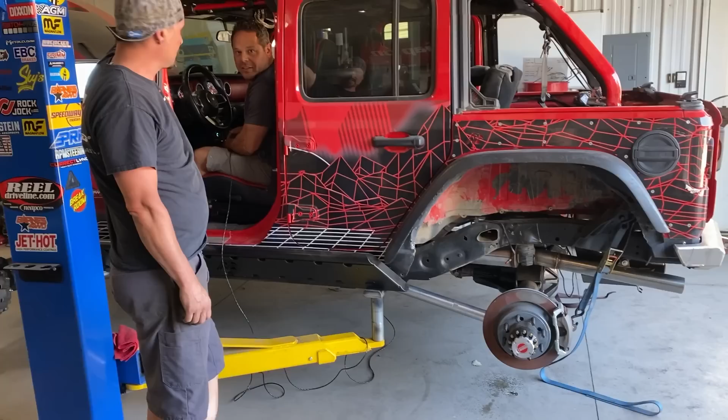That's open? Holy shit. Oh my God.

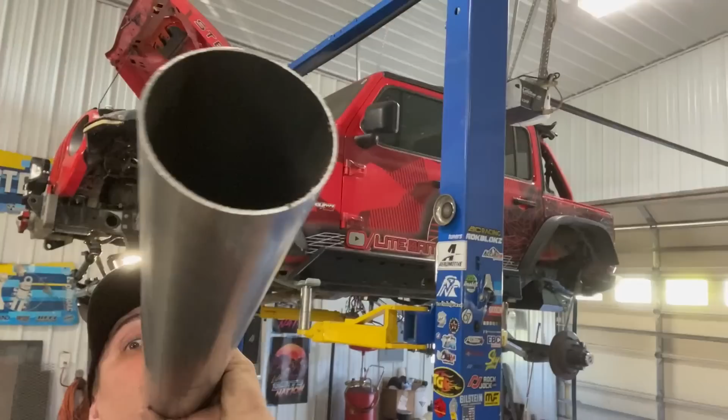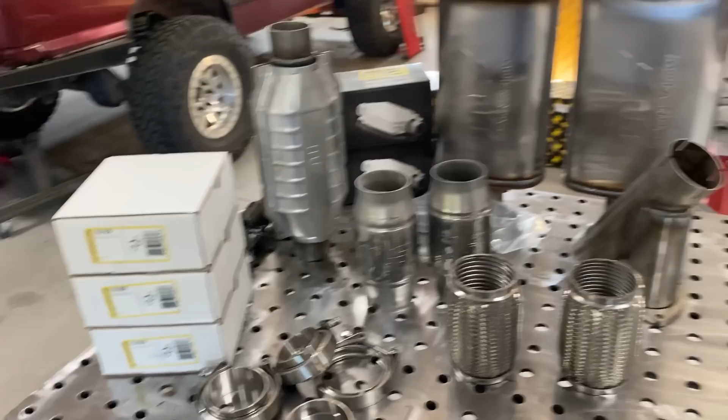We still don't have any shocks, but I do have time, and there's one other big job that we have to do to the stepchild before she can roll out of here. I need to put an exhaust in her. Let me show you what we got. We got a table full of Magnaflow parts. If you remember, the old one came out of the headers, went underneath the transmission bell housing, then up over the front drive shaft and collected with the driver's side header.

Now that we have the Atlas, we have a whole bunch more room under here to run all kinds of good stuff. I do love catalytic converters. I'm not gonna lie. Some of you guys are gonna hate me for that. I hate the way the newer cars smell so bad when you don't have the cats in them. Call me a wuss. I don't need my eyes burning out when I'm in the shop. I like the catalytic converters because it just scrubs the smell.

Long time ago, cats used to rob horsepower. Today they're extremely efficient, and I'll show you some cool ones here in a minute. But we have a lot of room to run cats and a muffler and a full exhaust. Now, Kevin had the bright idea that the Bronco has Baja mode. I know you saw that video. So he has quiet mode and Baja mode.

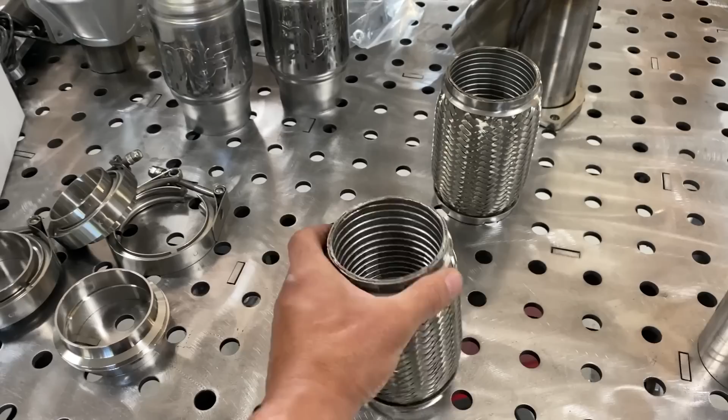Flip of a switch, it goes from quiet and tame in the neighborhood to loud and obnoxious on the freeway. Kevin had ordered some parts for this to do that, but packaging, we don't have the ability to do it. But let me show you what we do have. We got some really cool parts that will do some space saving. You gotta have somewhere for the flex to be because the motor is gonna move, the chassis doesn't. So this is gonna be your flex.

This is internally convoluted and not internally meshed. These ones will take more velocity, more power, more heat without coming apart inside. If you remember the Ferrari exhaust video, when we took the headers off before we put the Klein exhaust on it, the inside of that one bellow was mangled. The mesh doesn't like high volume, high horsepower, high velocity, high heat stuff. So this guy will do much better. So we're gonna run two of those.

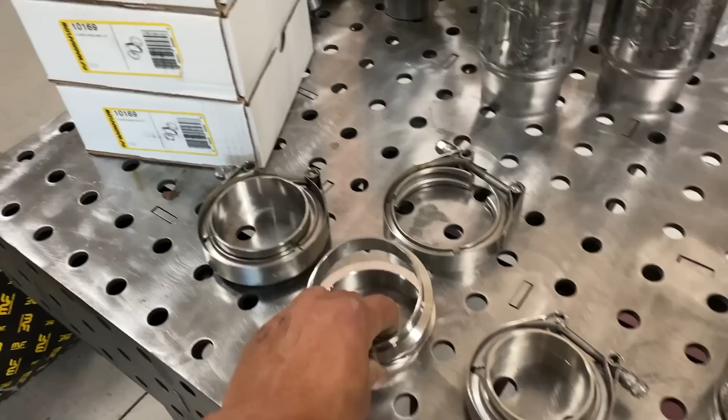We're gonna put it all together with V-bands. So I have some 2.5s and some 3s. The reason we have 2.5s is because Kevin wanted to run a bypass. So we were gonna put a QTP electronic cutout valve in there. What that would have done is we would have had 3-inch out of the exhaust and it would have gone straight out. And then we would have had a 2.5-inch go through, well, actually the 2.5 would have been on here. We would have cut this off to 3.

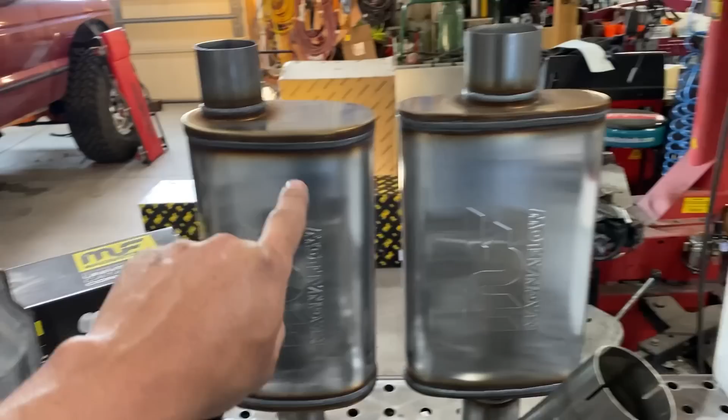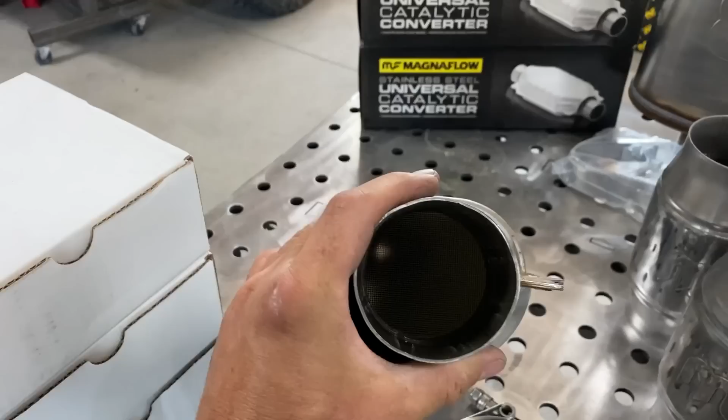It would run out the 2.5 through a muffler right here. No, it's actually that one. Through this, and then when you open the valve, it would run out the 3-inch. But again, packaging, and I'll show you why. Also, this is your standard catalytic converter, right? Got the meshy stuff inside of there, and this is what a cat looks like.

Now, this one I am not going to use, but this one is going on Phoebe when we get to the mess that's on it. Anyway, we're not using that. We're going to use these cool 3-inch catalytic converters. We also have a 3-inch builder's kit. Now you can order this straight from Magnaflow just like this.

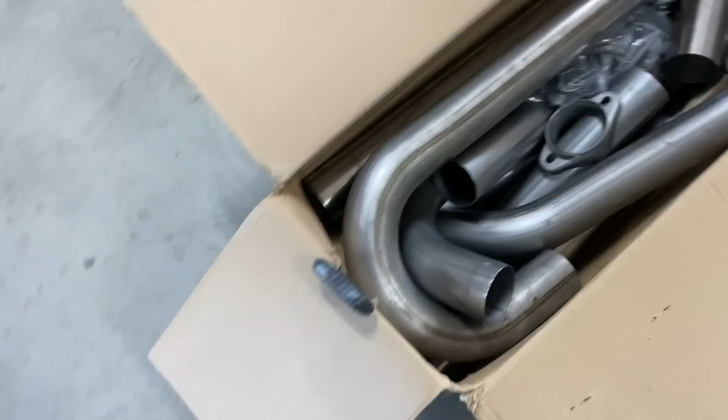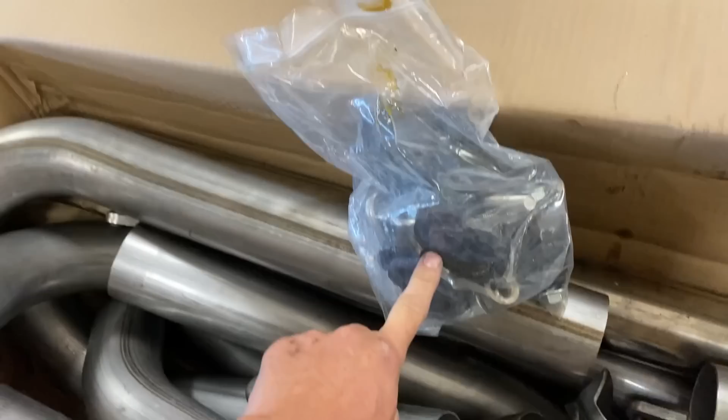This box will pretty much do a full exhaust from the manifolds all the way to the tailpipe minus a muffler and a cat. So this is a full box of pipe. Comes with 90s, 45s, straights, adapters, bellows, or the flex. This is what would go to your stock manifold. There's just a lot of cool stuff in this box. It also comes with hangers and the rubbers. So this is an entire kit to be able to run a V8 with a 3-inch exhaust.

I'm gonna dig all these parts out and show you everything that comes in the box. But this is what we got to put in her. So let me show you what Kevin's brain was thinking. I did a little doodle for you. This is what Kevin's original idea was. Both headers on the V8. We would come out a header, 3-inch pipe out of both of them. They would then go to a collector, then they would go to a Y pipe.

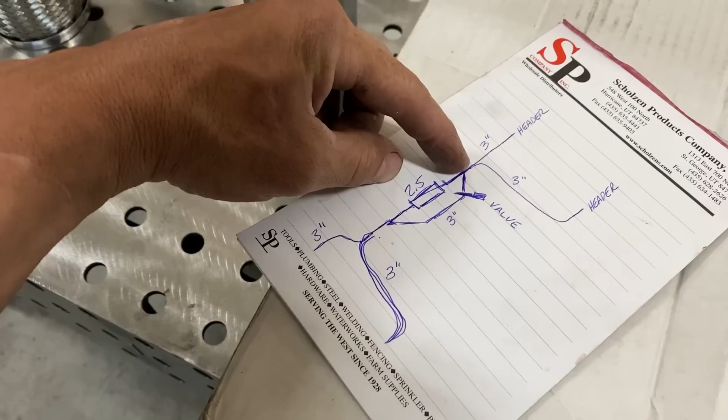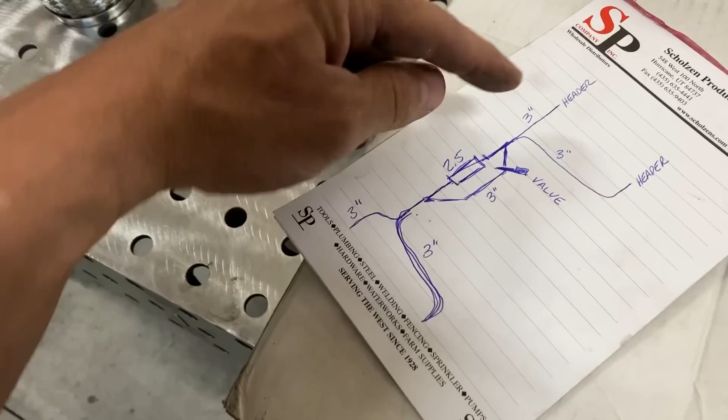We'd put the valve on the Y pipe. When the valve is closed, it forces all the exhaust through a 2.5-inch muffler and then back out to 3-inch and out the tailpipes. When he wanted sport mode, this valve would then open up because this is 3-inch and this is 2.5. The path of least resistance would be to go out the 3-inch, bypassing the muffler. So this would have been the path of least resistance, and the exhaust would essentially be louder.

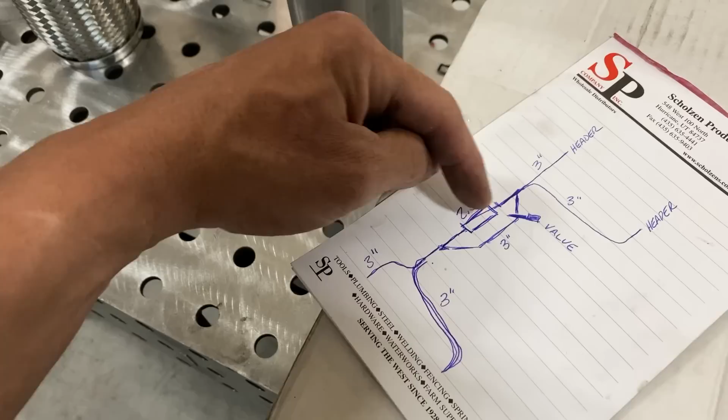This will cancel out harmonics and stuff. So if you pinch this down here, that exhaust wants to go down the 3-inch side. Will this be full straight exhaust sound? No, because some will still travel through this 2.5. The majority will go through the 3-inch.

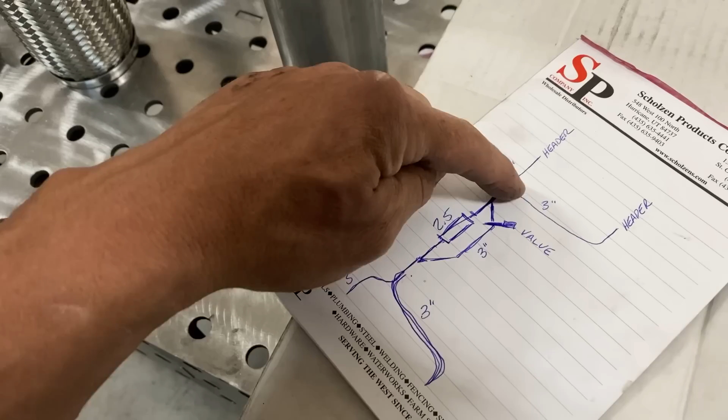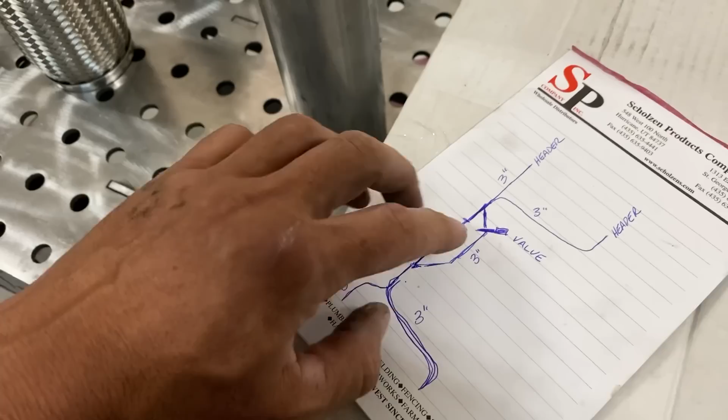This could be flipped also, so the 3-inch would go straight through and the valve would be here. I just drew it this way. For packaging reasons, you can do whatever you want, but yes, the path of least resistance probably would be the 3-inch to go this way. This is just showing you how this system would have worked if Kevin would have gotten his way.

With that being said, there will be a drive shaft right here. It'll have to collect on this side because there's too much stuff going on over here. The fuel lines are over here, most of the wiring, everything's over here. The only thing over there is brake lines, which I can deal with. Now, I have a whopping 24 inches between this cross member and that cross member to stick a muffler, that valve, and a whole nother piece of pipe.

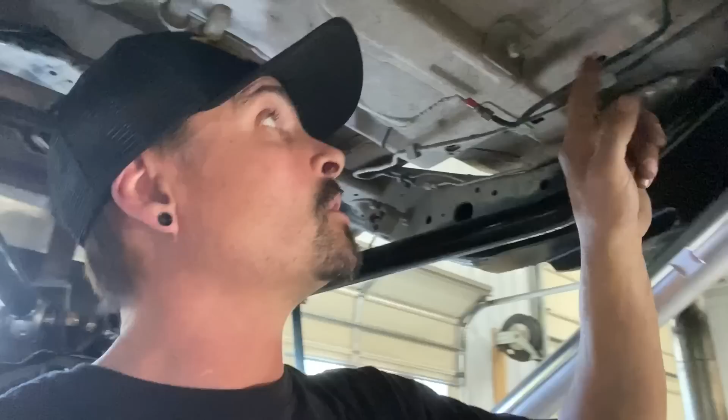And then turn and come out of this, go over this link. Don't mind these, they're just out of the way. This is all gonna get cut. Go around this, go over this link, and then go out. There is no way humanly possible that I can put a muffler, a valve, a collector, basically a Y pipe, another Y pipe, and then turn it and go out of that cross member.

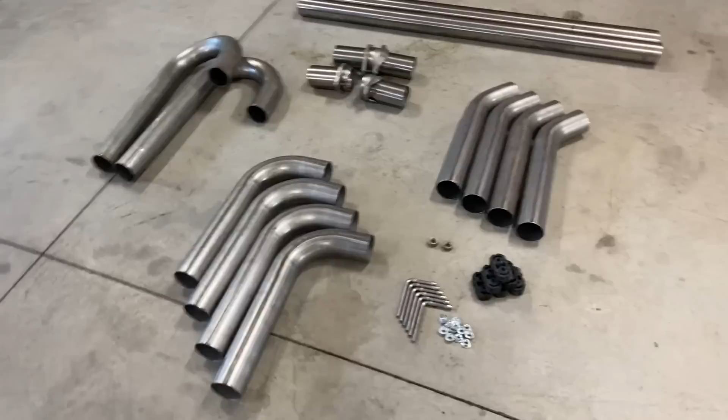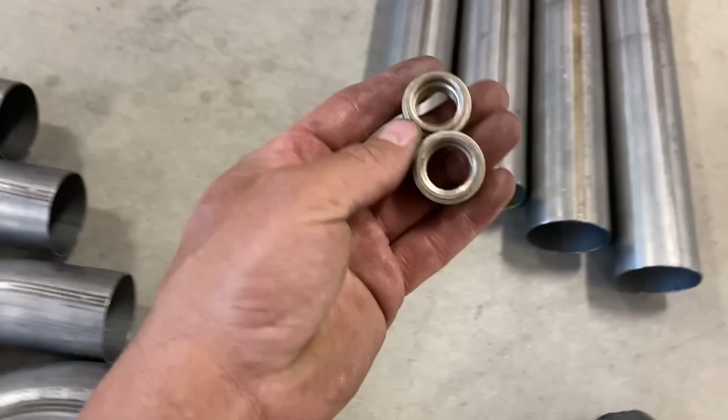So this is what comes in the builder's kit. You get 4 90s, 4 45s, 2 180s, 2 collector guys, a bunch of hangers, some rubbers, and you also get 2 weld-in bungs for the O2 sensors. And you also get 2 4-foot pieces of straight stainless.

Now the stepchild already has 2 O2 bungs that come right in the end of the manifolds, so I don't need those 2. So I'll add those to my collection. But that's what I have to do. I have a couple of random pieces upstairs too from like old kits and stuff. But I guess let's see what we're gonna do here to get this thing in.

Oh yeah, one more thing. This is what Kevin thought was gonna fit under the stepchild. This thing is like 32 inches long. It's not gonna fit. Look at the size of this. This is not gonna fit. Kevin, I don't even think this will fit under the Jeep by itself. This thing is gigantic. I mean, next to the trash can, it's taller than the trash. This thing is gigantic, Kevin.

That's what she said. All right, enough of the jokes.

I have 2 V-band 3-inch right off the manifold, so I'm gonna start there. So we're gonna go get some 3-inch V-bands. Probably goes directly straight into those two small catalytic converters, which should sit about here and there. I also got some heat wrap, which I haven't done yet. I haven't gotten that far, but this will all be heat wrapped because the exhaust is gonna run through here. And then I have to turn and go directly under this and collect over here. So let's get some cats in there.

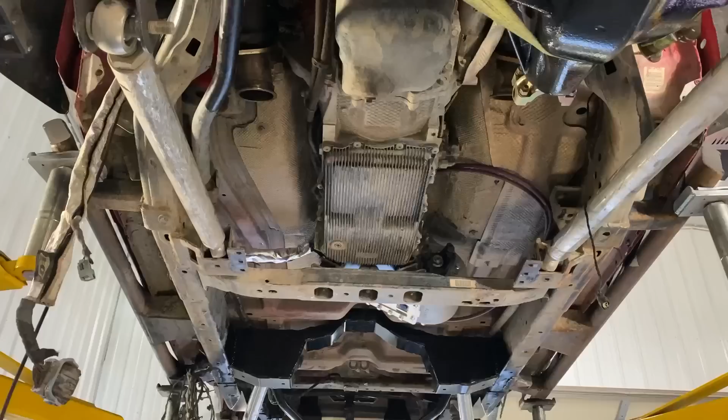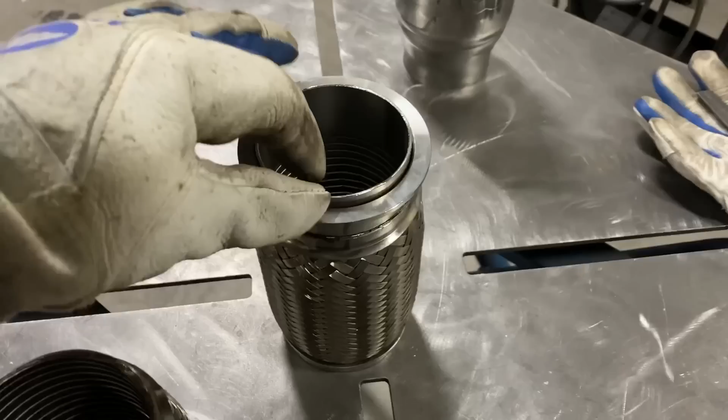All right, before we get the Multimatic 220 out and start welding on this, I have a couple of tricks for you if you haven't seen them before. Basically, I'll take a piece of the 3-inch, about 1.5 inches long, and what I like to do is recess it into the V-band, because then when you put the 2 pieces together, they self-locate. So that's why I like to do it this way.

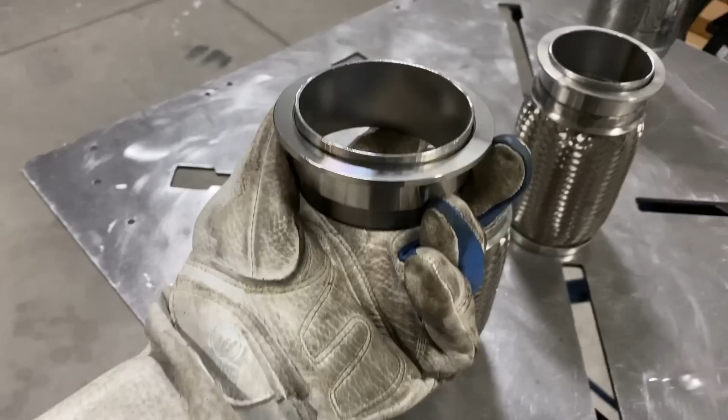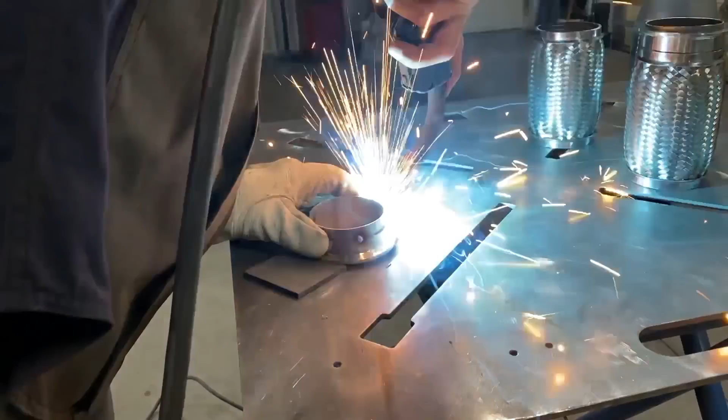I'm gonna tack this guy with a little bit sticking out, and I'm gonna tack it on this back side so that when I put it in this piece, there'll be a little space, and then I can make sure I weld all 3 of these things together at the same time. So just take some random 3/16, set it down, the flange on top so I have a nice gap, and I'll go ahead and tack it on in 3 spots. And now, you see there I have a nice gap all the way around that I can make sure I penetrate, and I can get all 3 pieces welded together with a nice perfect flange on top. And that's how we're gonna do it.

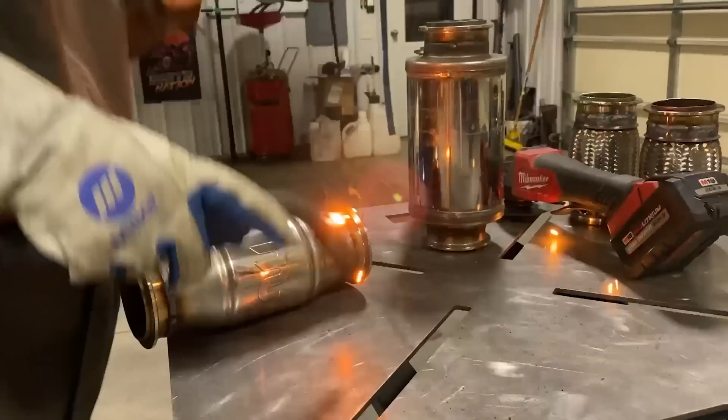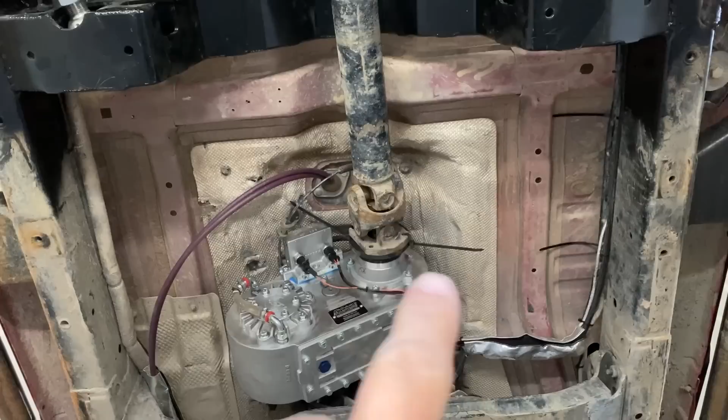The next morning, and I was out here with Kevin this morning, and in typical Kevin fashion, he was trying to change up some ideas, but I quickly reeled him in, and I'll tell you why. So here's the bottom of the Jeep, passenger, driver. It's got to go out. We have to exit up somewhere in this vicinity, go back, go over these top links because they're bent, so we'll have to go over these top links if we were going to go either way.

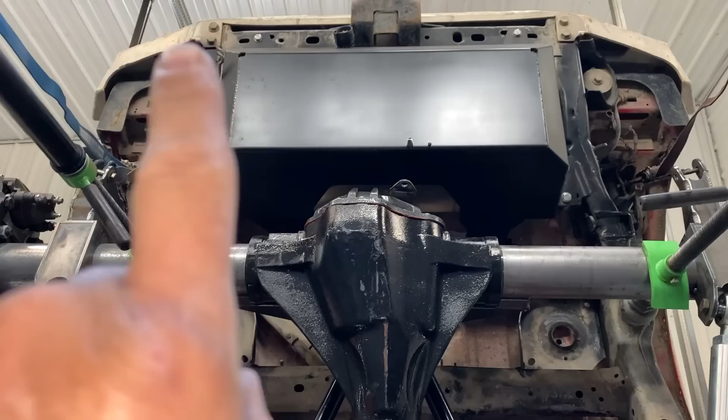There's actually plenty of room now. If there's no spring in there, there's plenty of room to get over the rear axle and then down and out the back. Now, we are losing the sway bar that runs through this tube, and we're going to put it behind the tank, which is great. I'll have an arm over here and an arm over there. I have to go down that frame rail because the arm sits on the outside over here.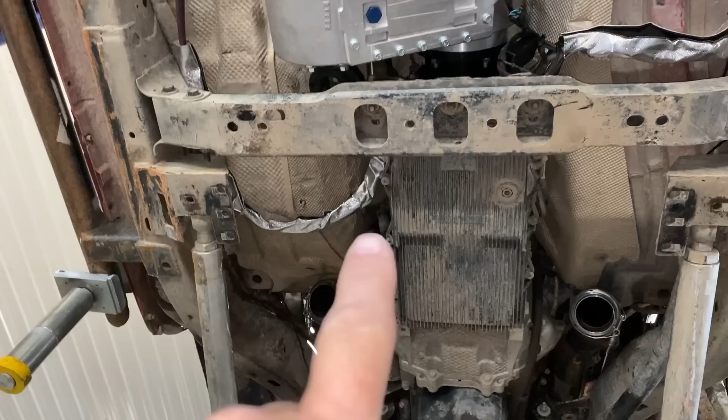Right now, I'm going to try to get the cat, or the flex and the cat to here. On this side, I have to watch out for the drive line because there is a drive line from there to there. So I just have to be on that side of that drive line. I've already heat wrapped all of the T-case cable, except for back here. I didn't get that far. I'm just trying to get it up here.

This group of wires and fuel line and everything are heat wrapped. I have room there too. That's not a big deal. And we're gonna see if we can get out that side with a muffler. But right now, these two guys.

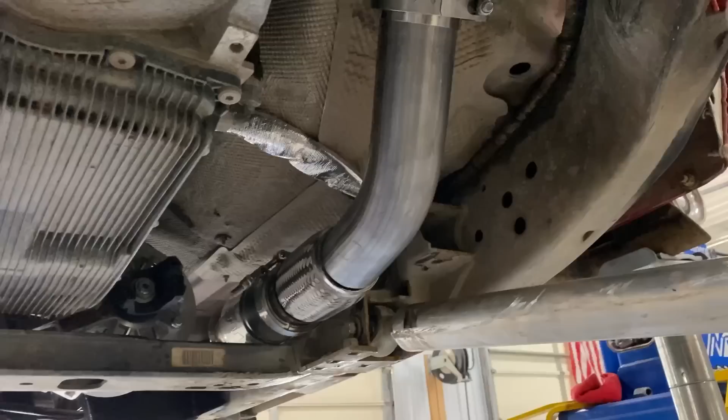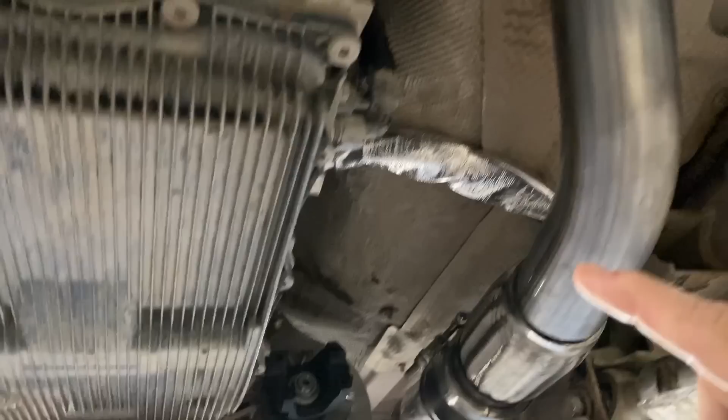First things first, that's just a regular 45 stuck up there and it worked out just fine. I know I need to get it off of there, but it's not welded. It's literally just sitting up in there. This side was a hair more than 45 and I already knew that, so I cut that one too. They're the exact same length to the flex and to the cat. This will be easy to do. Behind there is gonna be the fun part. So I'm just gonna get these guys tacked in right now and then we'll get to the fun part.

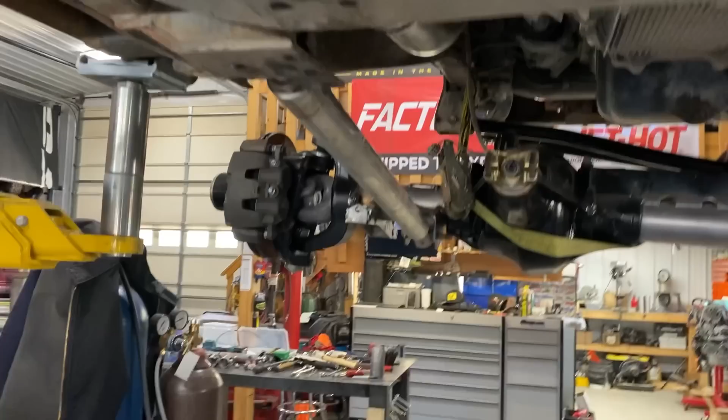So the Multimatic on a 16 gauge setting with .035. We got these bad boys all tacked up in here. It's a little tight on the clamp up there, but she'll move over just a little bit. And this one is here. Yes, I know this is touching, but it's because there's a clamp that's bolted up right there, so I can't get this up any higher. But I have room up here, so I can shove that up and get a longer clamp or put it in a different spot.

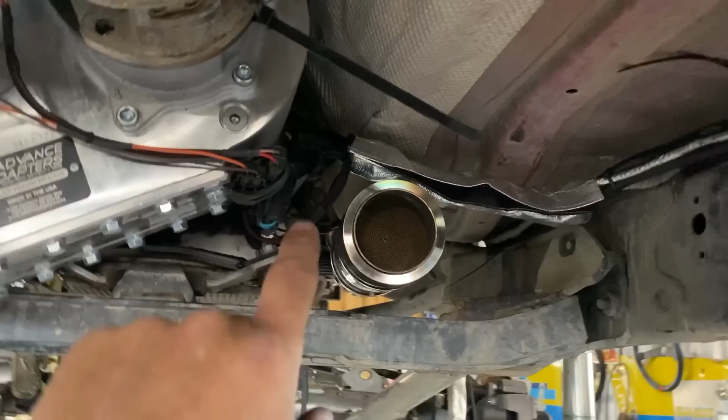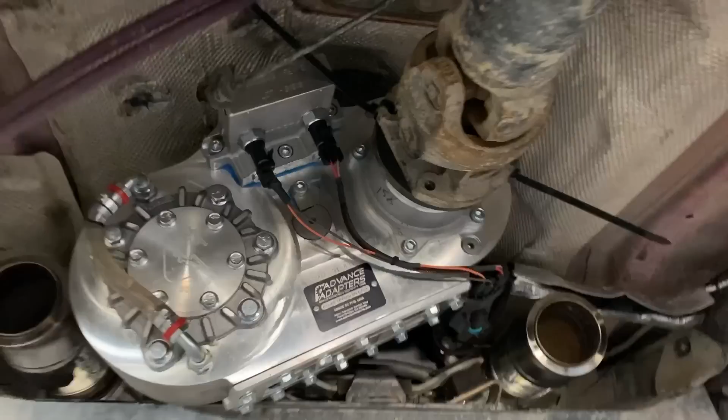I am gonna resheet that with like another piece of tin, so that it's like double insulated off of this cat. We will probably send these off to Jet Hot and get these coated, both of them. Actually, the whole exhaust, which would be really nice. So, with that being said, now for the fun part of creating like an X pipe right here. I need to create an X pipe and get it all together.

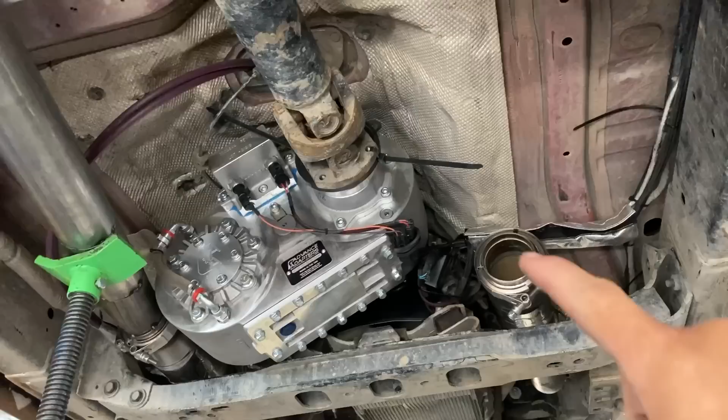All right, well, getting that piece in there was actually pretty easy. It's just a stock 45 around that end and a little curvy boy, boop, right into there. Now I get to connect that guy under there and swoopy whoopy it into there. This is the fun one. These are my favorite ones to do. So basically we're just gonna start with I think about a 45 and see where that gets us.

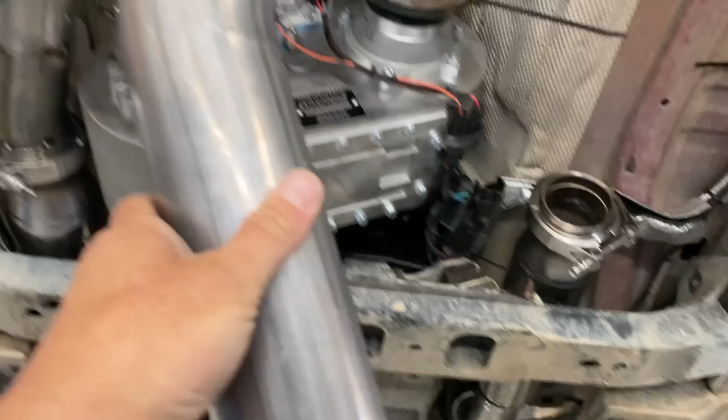Because my arms aren't any longer, we're gonna swoopy doopy that guy right into there like that. Long swoopy doopy guy over to here, whoop, something like that. So let's go cut that out on the bandsaw. And it should look a little something like this. Perfect. Now we just gotta do the other side, do the collector side over there. Tack up a couple of corner pieces. And then there, sits up all by herself.

Now we just trace this piece out, and then we'll go cut that hole out, and then we'll weld that up. Once we get it out and on the bench, we verify here. That's about right. Now you want to stay about 1/4 of an inch inside that mark, because if it's too thin, you'll blow right through it when you weld it. So we're going to stay about 1/4 of an inch inside that mark, and we'll start walking it out from there if we need to, before we get it back in there and tack it all up. Right now I'm just going to cut it out about 1/4 of an inch inside that line.

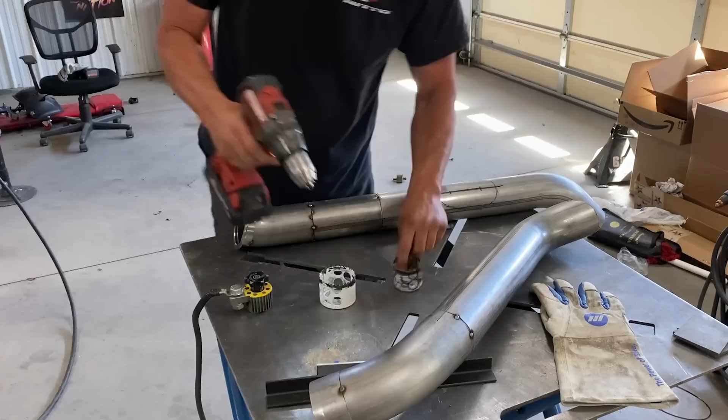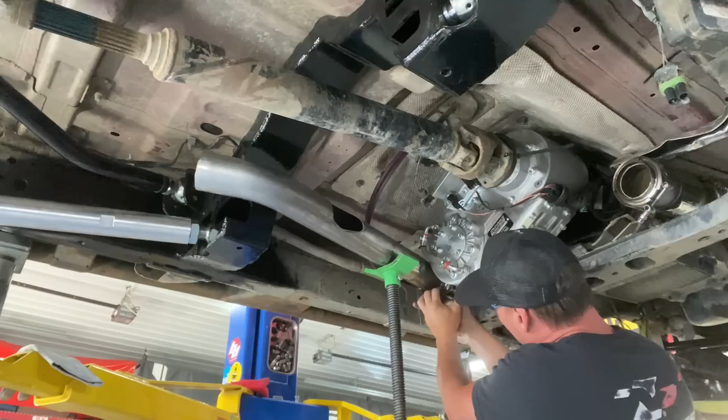All right, I'll just go ahead and get this reinstalled. There we go. And we just push this one in here. She fits really good, really good. Oh, I'm so excited. Like, no gap. All right, well, we'll go ahead and get this all tacked up in here then.

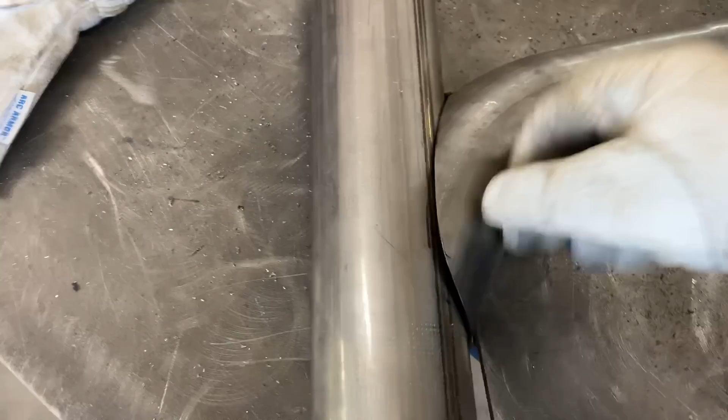All right, now that we got it on the bench, you can see there's a gap here, but it's not from fitment. It's where the pipe starts to go straight. So I'm just gonna pinch this a little bit and get that in there. I mean, I guess I could have cut this a little bit longer and stuff, but whatever, it's fine. Just give it a little pinch there, pinch that in a little bit, weld it up, should be good.

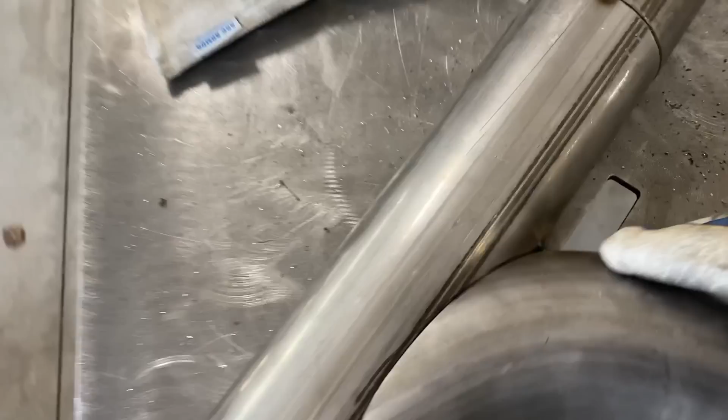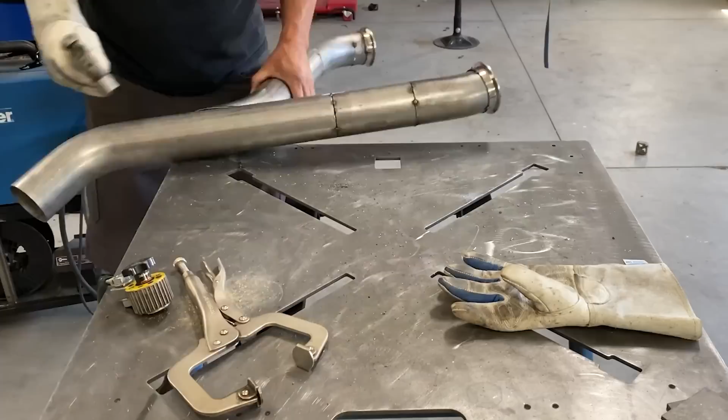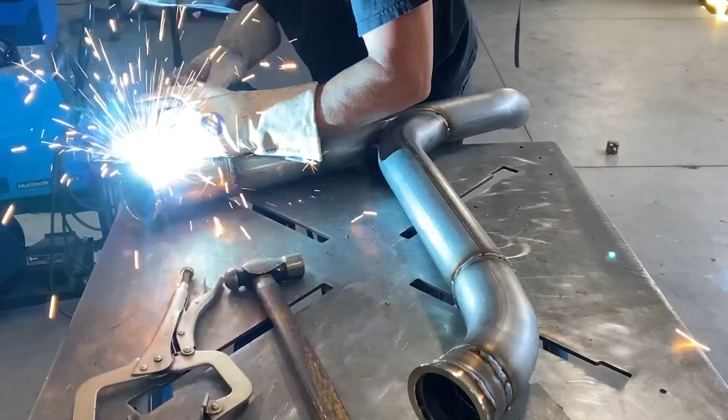The fitment is really nice back here. I burned it through up there and it just fell, but it's pretty tight. I'll do a little bit more welding on all this stuff. All right, so we got it all welded up and all back in. Got it standing back up. I do got to put a hanger up in here somewhere, but we have a lot of clearance here. And then I just took a couple pieces of scrap and got it up over this link.

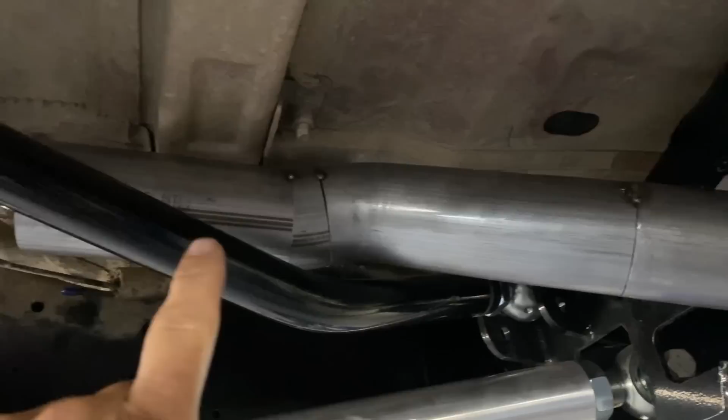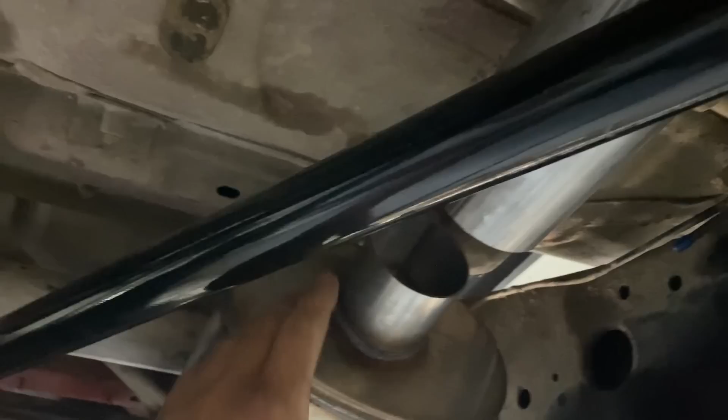This is 3-inch. We are gonna go to a 2.5-inch muffler. And the reason we're going to a 2.5-inch muffler is because we're gonna try to cancel out as much sound as we can. But this is not gonna be restrictive at all, going from 3 to 2.5 through a muffler this far back, because we've gone so far away from the motor that temperature has cooled off and the velocity has slowed down. So we will go through this 2.5 and we will be just fine in doing it because the velocity is slowed down, so it's not going to choke it off as much.

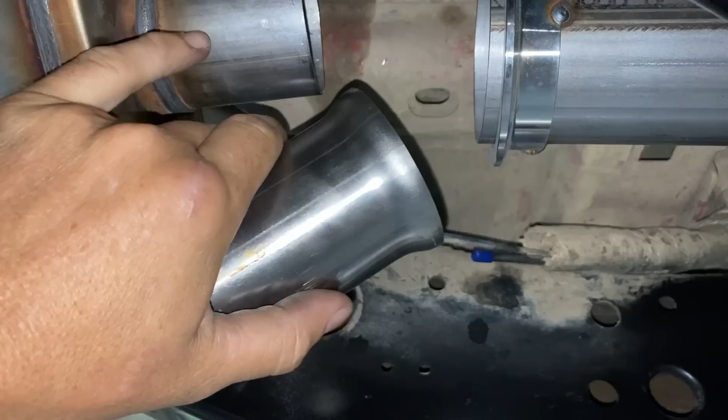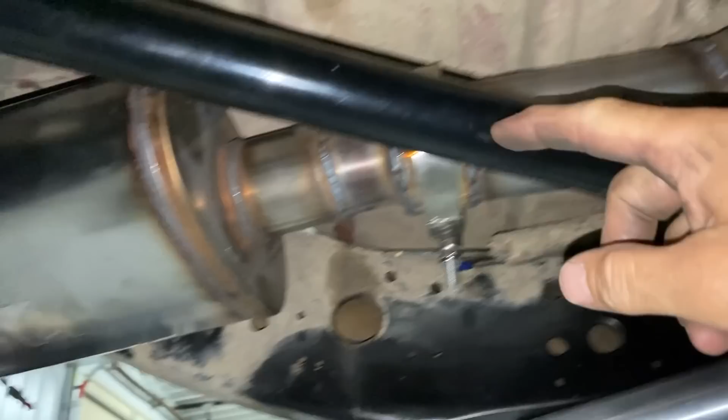Yeah, I almost forgot to put a V-band there. So another V-band with a little bit sticking out, and the other one can locate. And then I found this bellow for 2.5, which fits in here, and then it fits in the 3-inch pipe, so I'll put the other V-band on there and then weld that into the V-band, and that's how that's going to go. Alright, so we have the muffler in. There's space above this bar. She's floating in here right now. I gotta put some mounts on it off the frame, but we'll do that in a minute.

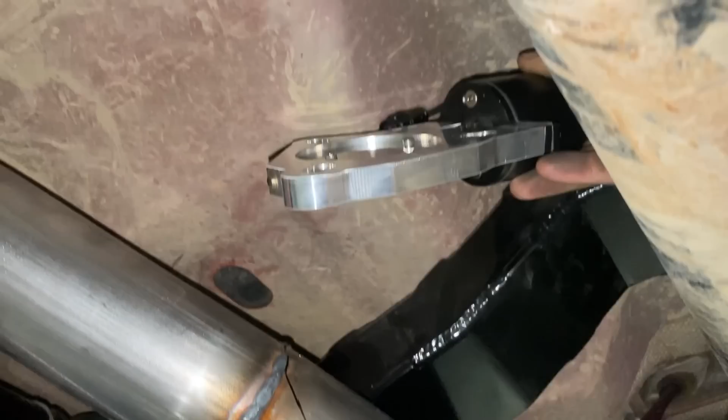I want to come out in this area, and I want to go up over the drive shaft and then out this long tube to here, and then turning down the side of the gas tank and out this side for our wide open. Which means in this area right here, I need to put this QTP valve. So I think I have room to run it just like this, basically, right off of that guy. So it's a 3-bolt flange. If you come over here, we have a 3-bolt flange off of this Y pipe.

Now I really like the fact that this has a swivel on it. So what I'm gonna do is I'm gonna cut this off. I was gonna use this whole thing, but we can't. It's not in the right angle, and it's at the bend here, so I couldn't use this. So we're gonna cut this off here and weld it onto this pipe. I know it doesn't have a gasket, so I've already ordered a gasket. We'll get it in without the gasket.

I do have 2 of these Y pipes, so I'm gonna cut both flanges, so there'll be a flange on each side, and you'll be able to rotate the valve in there and make it fit perfect. So what I'm gonna do is I'm gonna cut this Y pipe, cut the other Y pipe, I'm gonna cut this pipe, chew some bubble gum, and stick them together. We'll get the valve in it.

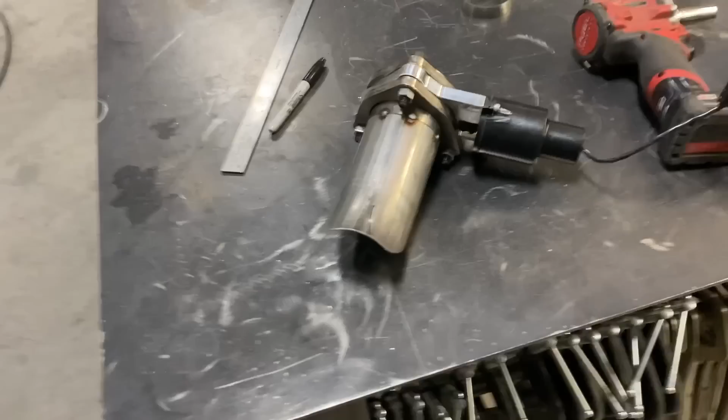All right, and there it is, tacked up, 2 flanges cut off. I do have MLS gaskets basically coming for this with fire rings. Now we can loosen these bolts and we can orientate this motor wherever she needs to be, but this is free from this flange. They slide, so all we gotta do is loosen this thing up and move it around.

All right, so we got that little guy welded on. Flange is on. It's a little warm right now. We'll go ahead and get this thing put back in the morning, and then all we got to do is make some tailpipes, and then Kevin wants to hear it. We'll do that in the morning. I will see you shortly.

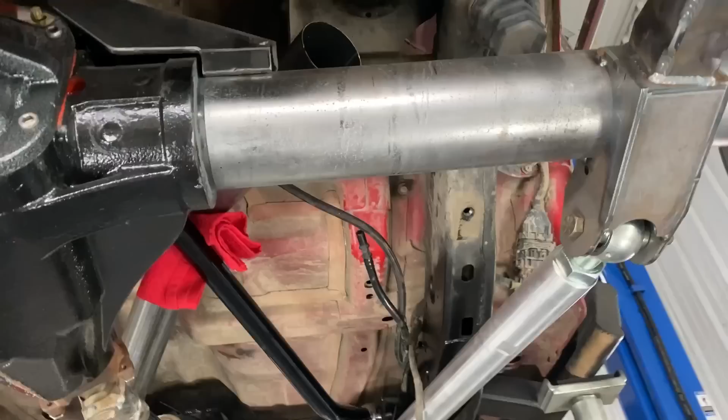All right, we got everything back in. I just added a couple of pipes real quick to go up and over that bar. It gets us to the back side of the axle, so now we have 2 tubes out the back side of the axle. One is for straight pipe, and one is for quiet mode.

Got a couple tailpipes whipped up, and there they are. Yes, I know this one's longer than that one, but it's because I cut these both the same, and then that angle back there, easy, easy. I just chop this thing off. They fit really well. Got a nice gap here. Same on the other side.

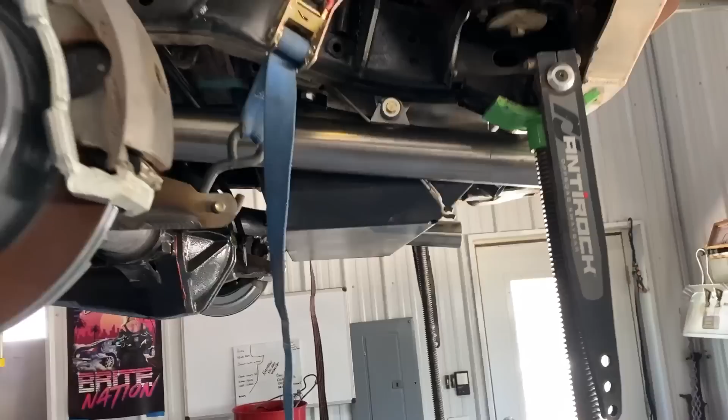I gotta put 2 hangers back here, one on each tailpipe, probably off the top of the frame right here. Yeah, we'll get it all apart one more time. Weld all the back half up, stick it in there and start it. Because, I mean, he can't change it. This is what it is. I'm kind of out of time, and I really don't have anywhere else to put it, so 'tis what it is.

And as far as the rear hangers, I know you've seen me use these before. They're called snappers. You can get them on Summit. You can get generic ones on Amazon if you'd like, but these are the real snappers. This bracket has a 3/4 hole in it. This bracket has a 3/8 hole in it, and I'll take it apart for you in a minute. This goes on the frame. This one goes on the pipe. That's where she's gonna go right there. She'll get welded in. For some reason, I'm short one. I can't find it, so I ordered some more. But I'll use this one to set up both sides.

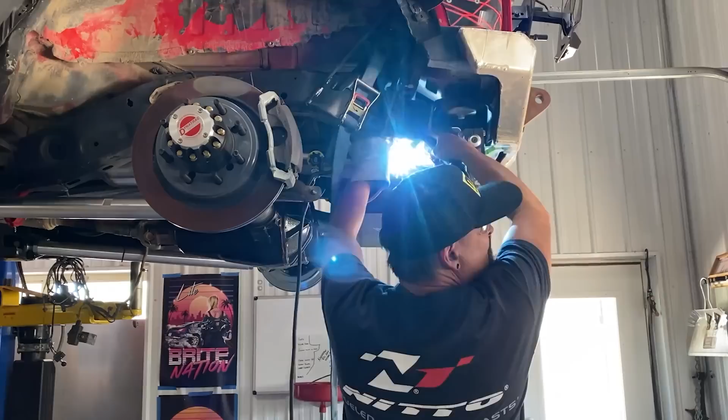Okay, so we have officially gotten to a point, by we, Chris. Chris has officially gotten to a point where we are going to start the stepchild back up. I helped. I stayed out of the way for days. True, very true. We want to hear what the new exhaust sounds like, both fully opened and with the valve closed, et cetera.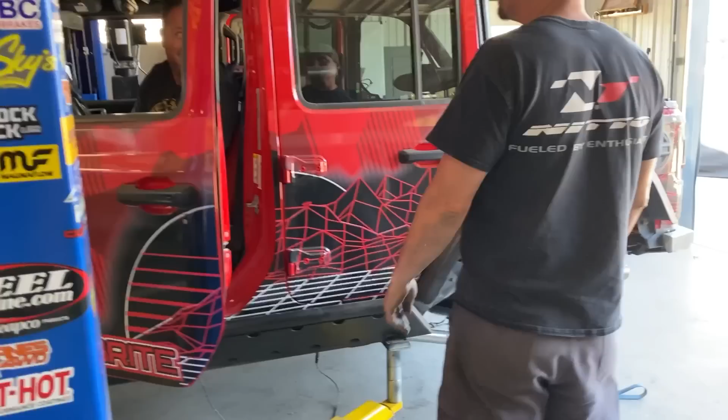Oh my God, that is quiet. That's so quiet. Hey! That sounds good. It sounds fantastic. That's open? Holy sh**. The difference between totally shut and totally open. Now open it. That made it sound like a freaking... Stop. You gotta stop. Our neighbors are gonna hate us. That sounds so f***ing good. I thought I just started the Ferrari. Have you heard a Hemi sound like it was at 8? That was only at like 5,000. I'm not gonna lie. Holy sh**.

I was a little bit disappointed at first because you started with it closed. And I was kind of like, that's kind of pathetic. No, it sounded clean, like if you want to cruise on the highway on a long distance trip, or if you want a quieter trail ride. But then you opened it, and it sounded like I started the Ferrari. That is the most exotic sounding LS I've ever heard.